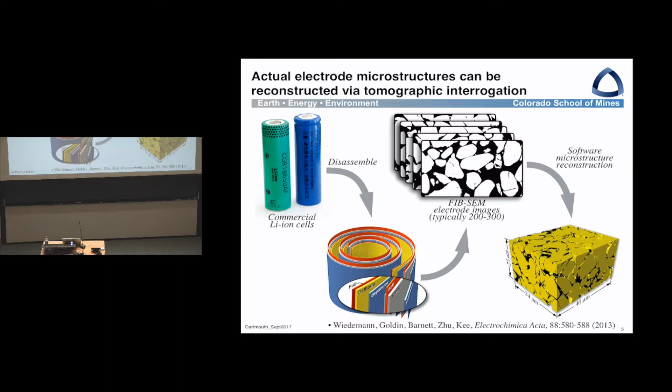Anyway, let me just, before I forget it, so this person, Graham Goldin, is your neighbor. He's sitting here in the middle, works at CD-adapco and does a lot of work on battery modeling.

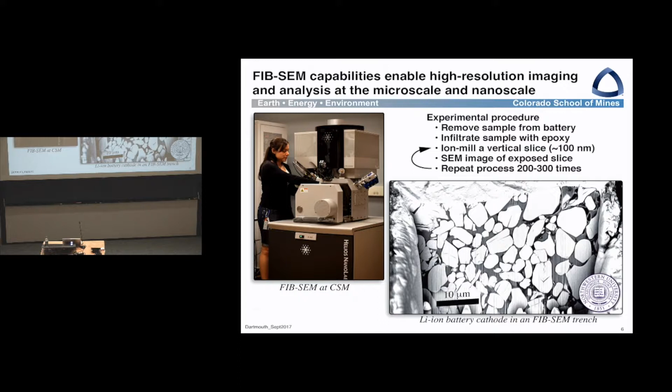Okay, here's just a quick image on how the FIB-SEM works. This is a focused ion beam SEM. You use a gallium beam to mill a face, take an SEM picture, mill it back another 100 nanometers or so, take another picture, do it a few hundred times, then just deliver these hundreds of images that I showed on the last slide to software, which reconstructs the three-dimensional microstructure.

We then mesh. I mean, these are very large simulations on a very small piece of real estate from the battery. But we can mesh this and look at the electrochemistry, look at the transport, and so on at that micro scale. So I'm not going to say much more about that. I mean, that's a talk in its own right that I want to move past here.

But once we've meshed it, then we actually go to commercial software. In this case, go to ANSYS, which again is your neighbor in Lebanon, as I'm sure everybody knows, and solve this electrochemistry problem on this microcube. I say almost a little bit tongue-in-cheek, if you look at these equations and you go, yep, that's right, okay, we're done. If you look at it and say, where in the world did that come from? You're not going to learn it in this lecture. It takes too long. So we're going to solve an electrochemistry problem on these microcubes.

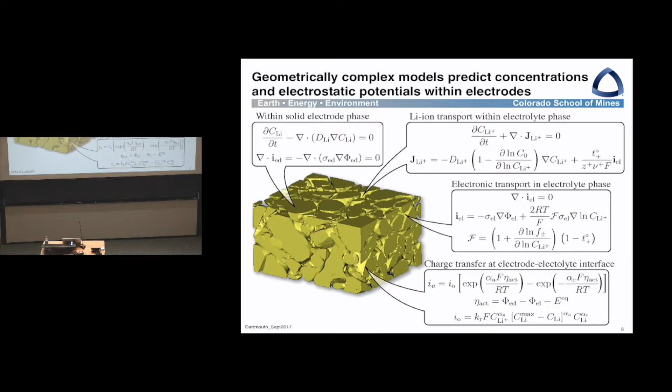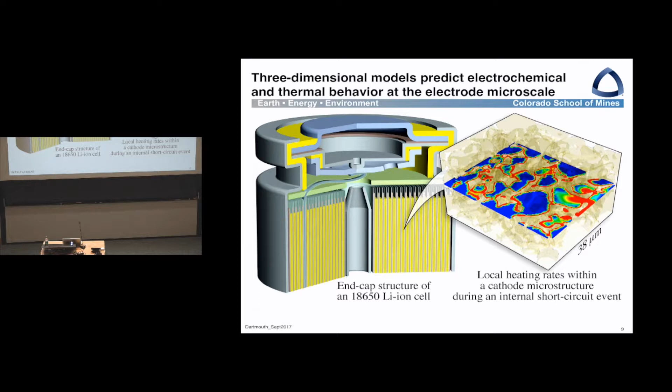This is one such result where we're looking at local temperatures as we discharge a battery. And you'll see relatively high temperatures just around the periphery. We've put a little bit of a short in here, so as the ion current is necked down toward that short, you see some local hot spots and so on.

One of the important things that we derive from these models is things like the effective conductivity, right? So we've got a very complex microstructure here, but if we're asking the relatively simple question of what is the average or the effective conductivity through that composite structure, it turns out even though the geometry is very complex, the computation is actually quite simple. And you can solve that on a big computer, but in a few minutes. I mean, that's a fairly rapid calculation.

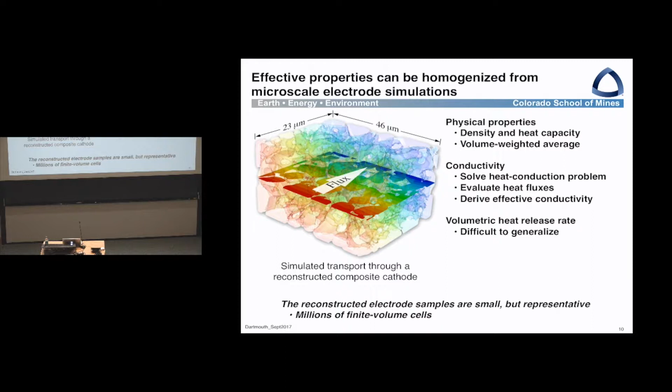And from looking at the actual fluxes through this microstructure, we can derive what the effective conductivities are. And that's actually quite useful to map that actual microstructural architecture back into models of the whole battery. What's difficult to do, and frankly we haven't really figured it out, is how to map the internal heat generation back to the big model.

Okay, so with that kind of background at the microstructure, let me take a huge step in length scale and talk about modeling whole cells. These are prismatic cells where we're showing temperature distribution under some discharge conditions. I'll point out that this simulation was done using ANSYS software, again, your neighbors here.

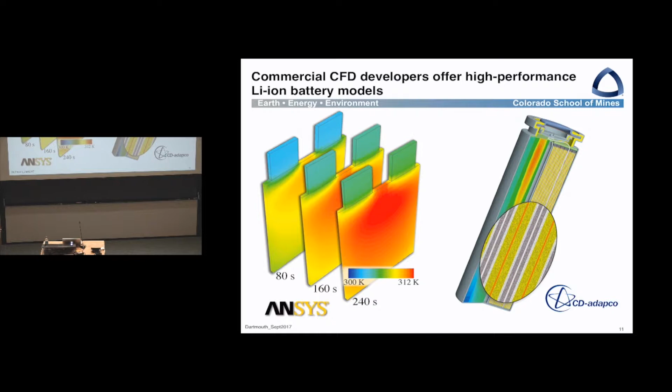This simulation, where we're looking here at hot spots around the tab, was done with CD-adapco, also your neighbors here. So you guys are really well positioned in this space to have very knowledgeable neighbors in the battery space.

Here's one simple example. We worry a lot about overheating then leading to accidents. I haven't seen one in the news recently, but Boeing Dreamliners had accidents that sidelined those airplanes for many, many months. Galaxy something or other telephones were catching on fire. These are real issues. It's not like your laptop catches on fire regularly. In fact, probably nobody in this room has ever had a laptop catch on fire or a telephone. But it is a real issue to make sure that these things are safe.

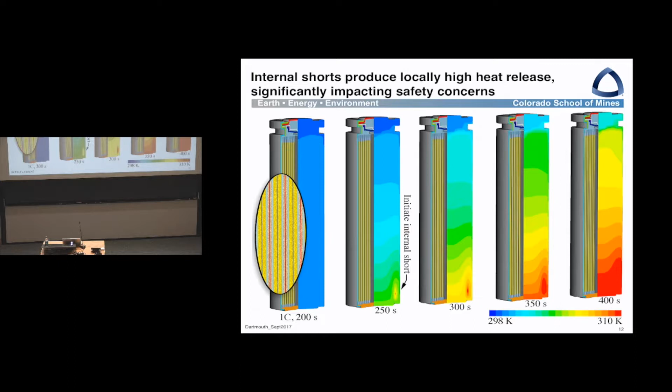So we're quite keen to know what happens if, for example, we have a dendritic short someplace in this battery, how that thermal response propagates and leads to accidents. What I'm showing here again at the macro scale or micro-macro scale in a jelly-rolled structure is if I look at the effective conductivity radially, then these foils have almost no effect because the thermal resistance of those metals is very low. There's basically no resistance. So the radial heat conduction is driven essentially entirely by the conduction of the electrodes.

But in the axial direction, it's quite different because now these metal foils, the current collectors, can channel heat axially much, much more efficiently than radially. So when we look, here again, I've taken a battery and just arbitrarily produced a short. In other words, a local hotspot in that battery.

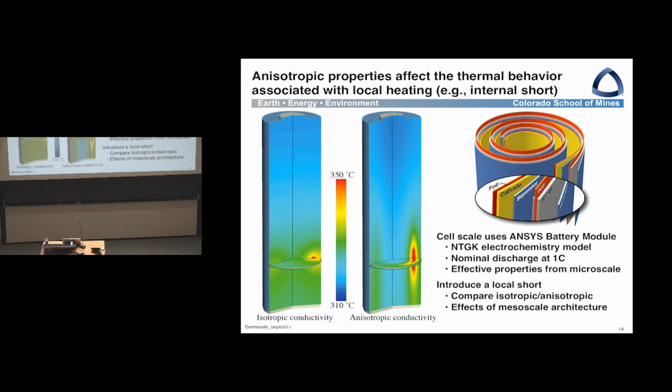And so what you see here is that compared to assuming isotropic properties, in fact, they're anisotropic properties, and because of the role of the current collector foils, you preferentially transport the heat axially and less so radially. And that has a big effect on the time it takes to come to a thermal runaway or some other accident event upon an internal short.

I take two slides here as a little bit of a detour, but actually at least an interesting detour. So this is in the chemical-mechanical coupling. So here is a lithium cobalt oxide particle that we've extracted from this three-dimensional structure I showed. We just extract an individual particle and intercalate it. And what I'm showing here, actually rather old data from Reimers and Dahn, shows that as you intercalate lithium into this cobalt oxide, at first there's a monoclinic phase, then there are actually two hexagonal phases as you intercalate or as you reverse back in the case of charging.

What's interesting about this is if you look at the lattice spacing, there's actually a considerable change in the lattice spacing as you intercalate, and it goes in a direction opposite from what you might think. You would intuitively think as you push lithium into this matrix, it would blow up like a balloon. In fact, that's not what happens. The lithium, since it's a positively charged ion, tends to attract the oxygen, the anions, and so it actually shrinks a little bit, and there's a fairly substantial difference in the lattice volume between these two hexagonal phases here.

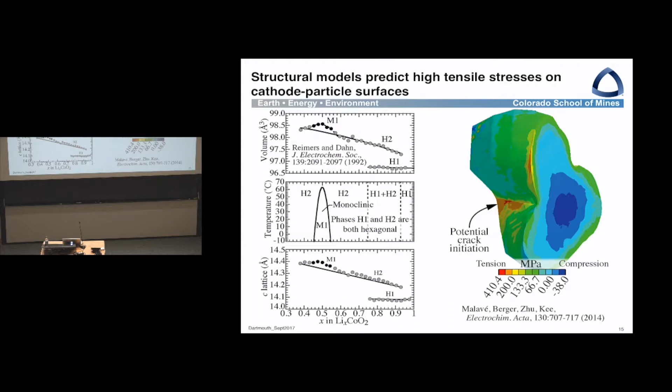With that kind of background on modeling the batteries alone, let me shift now to how we take some of that knowledge from modeling the batteries in sort of large-scale modeling. How do we incorporate that knowledge into things like control?

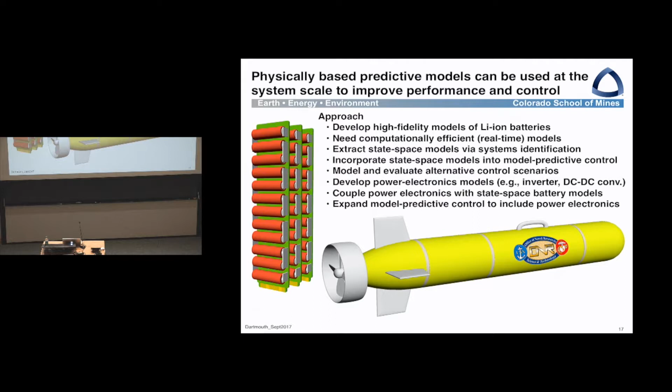They're often assembled onto blades that look like this, where you have diagnostics, electrical diagnostics and thermal diagnostics on the blades. And one of the things we want to do is to be able to incorporate some knowledge of how these batteries work into the power electronics and into the control scenarios. And I'll talk about that in the next few slides.

Okay, so a central connecting block between, let me just call it large-scale physical models. I mean, these can easily be million-state models, finite volume representations of thermal, electrochemistry, and so on. And we want to do a number of things like interpret the complex impedance, implement model predictive control, look at state of health monitoring, and so on.

And this sort of, in some sense, rather innocuous looking mathematical statement of a state space model is the bridge. And I'll say a lot more about that in the next few slides. But this is a locally linear model. And so you should rightly ask, come on, how can a linear model possibly represent a battery which is quite obviously nonlinear? And I'll try to explain that as I go on, but it can, but with some twists.

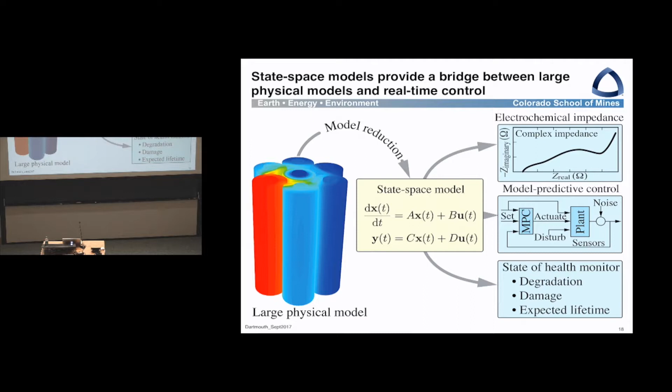So assuming that I need this state space model as the bridge between the physical models and things I want to do, I want to now talk about how do I get this state space model. So, okay, that's not what I want to say next.

I'm simply representing here what the battery management system looks like, which in our case will be a state space model and some power electronics, which facilitates perturbing the loads and so on in a way to understand the physics. And with actual sensors, actuation back to the system. Okay, that's just kind of a cartoon picture.

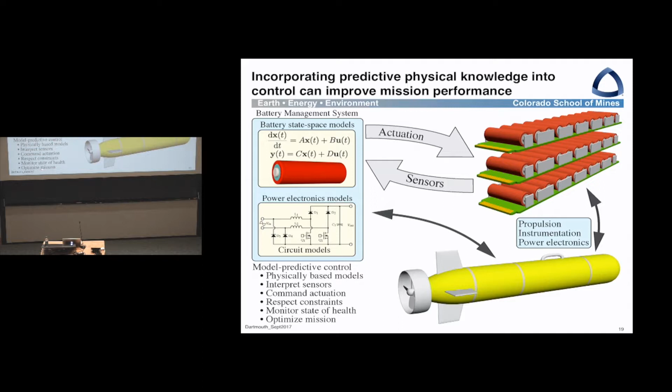Okay, let me come to the state space model. By the way, I'm just curious, how many people know what state space modeling is? Is that something we talk about here very much? Maybe a few do. Anyway, so if you already know, this next segment is sort of sophomoric, I suppose. If you don't know, hopefully you'll mostly get it.

Okay, so here's a state space model. X is called the state vector. It's an abstraction. You cannot associate an element in that state vector with something physical, like temperature, voltage, or something like that. It's an abstraction. In some sense, you could argue that's a downside of such models, but it is what it is.

U is the actuation vector. So if I'm controlling the current in charging or discharging a battery, then U is that current that's actuating the device. Y is the observable. So for example, I actuate current, but I observe voltage, temperature, maybe other things. But that's the Y vector, the observable. And D is basically disturbances and various things which sometimes come in.

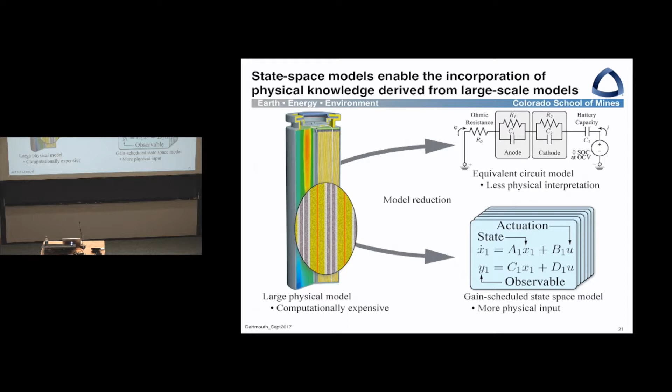So even though the state vector is an abstraction, the observable is not. And so these models predict observables, and we'll use that to interpret sensors in the control.

Here again, if you're familiar with impedance spectroscopy, which is just practiced everywhere in electrochemical devices, whether it's fuel cells or corrosion or batteries or what have you. What we're showing is the impedance in the complex space. These are frequently used, in fact, almost invariably used in every electrochemistry lab to represent electrochemical behavior as the complex impedance

associated with the device. What I'm just showing here are particular impedances that are for a particular battery at different states of charge, whether it's charging or discharging.

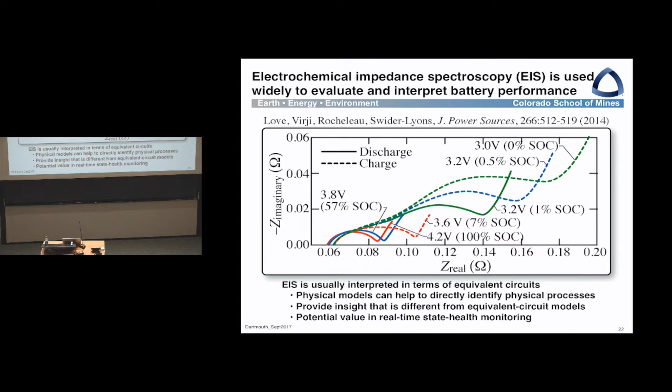In other words, the impedance tells you a lot about the state of charge of the battery. So again, at the risk of saying things that are obvious, if they're already obvious to you, what is the impedance? Well, as you say, harmonically perturb, say, the current onto an electrochemical device, and the response, say the voltage, is shifted both in amplitude and in phase.

Okay, now, in some ways this almost seems like cheating, but because that's so important, I mean, basically every electrochemistry lab in the world has an impedance spectrometer. That's just everywhere. And it's basically linear algebra manipulation. So all this stuff is automated in MATLAB, meaning if I've identified the state space model, which I haven't yet said how I'm going to do, that's coming in just a minute.

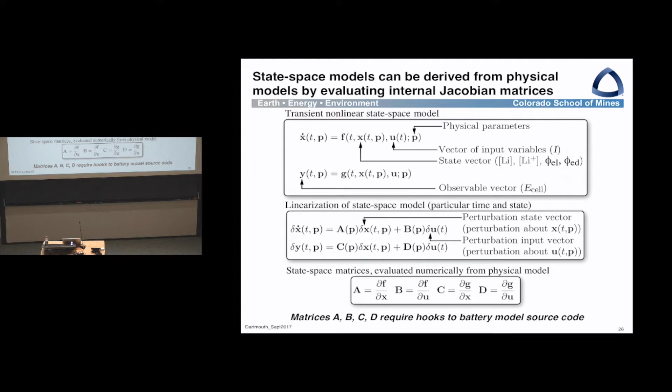Okay, this is what I said in words just a minute ago, again, in a pretty abstract way. If you assume this is a big model of a battery that may be 1 million states that I can differentiate, I can extract these matrices. Let me just leave it at that because it's not really what we do, unless we're just working on our own models.

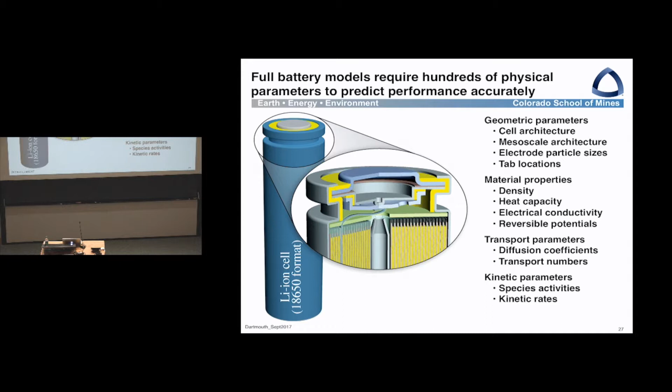Okay, so let me come back now to a full battery model. And let me say there are many, many parameters in a battery model. What are the thicknesses of these electrodes? How thick are the collection foils? Where are the tabs? What are the material properties? What's the microstructure of the electrodes? What are the diffusion coefficients of lithium ions in, say, ethylene carbonate electrolyte solvent? There's literally hundreds of parameters to define a particular cell.

And so one of the tools that we use is coming from CD-adapco, or actually more directly from a company called Battery, I can't remember, Battery Design Studio is the software. Is that also the company? Anyway, it doesn't matter. So part of CD-adapco is they've got a couple of batteries that are very, very well defined in terms of the space. And this is just showing a user interface where it gives you the opportunity to literally put in hundreds of variables to define a battery.

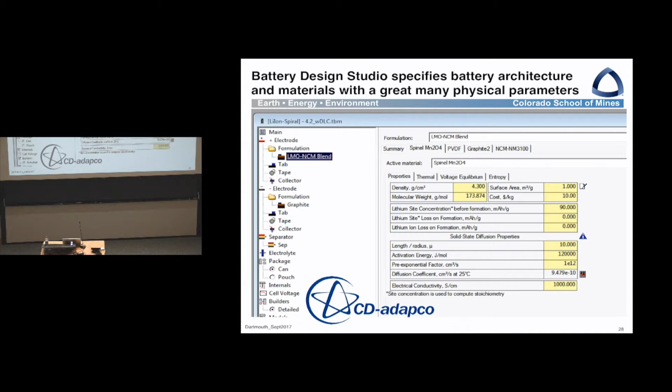And in a few batteries, we use a Sanyo 1500 milliamp hour battery that's been very well characterized for a lot of what we do.

Okay, so interior to the software like Battery Design Studio are a number, like 20, so-called Newman models. So John Newman, professor at Berkeley, published this general approach to modeling batteries, one-dimensional models, in I think the first paper was 1993 or so. Okay, so a long time. But those are the dominant models in the lithium-ion battery space.

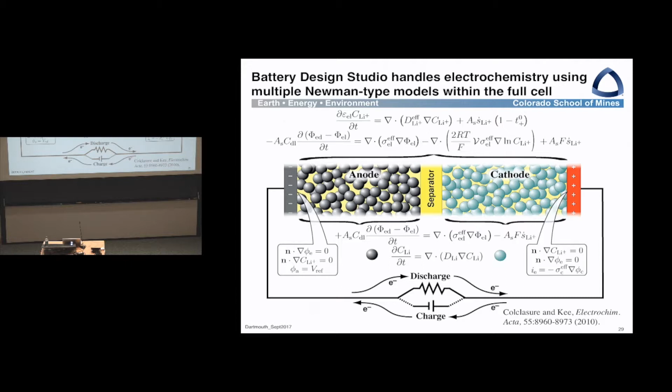And what this Battery Design Studio does is lay out the full architecture of the battery and then implement roughly 20 of these models interior to that battery, which then gives the overall performance. This is our own representation. I mean, many people have built essentially replicas of the Newman type models. And as I said earlier, I'm not going to dig into the mathematics of that.

Okay. Now, how do the PRBSs work? Well, we take, again, roughly speaking, a million state model, and we perturb it with small current steps in the milliamp range. Okay, so small current steps that are of different duration, but usually the same magnitude. So then we drive the physical model with these perturbations and observe the response.

In this case, I'm simply showing the observed response in the voltage, but we also look at temperature and other things. And because this is so widely practiced in the control literature, MATLAB has automated those tools. Again, I can go into the mathematics of that, but as a practical matter, I take this input stream, drive a physical process with this input stream, observe the response. I now have two long vectors, input, output. And there may be multiple outputs, there may be multiple inputs.

And again, at this minute, I'll just make it almost like magic. You present those two wave trains to MATLAB, and it delivers you these matrices. I mean, it's so widely practiced that it's been automated. And so any individual doesn't really have to go write that software. It's just already been written. It's probably worthwhile to understand it, but you don't have to write it. It's done.

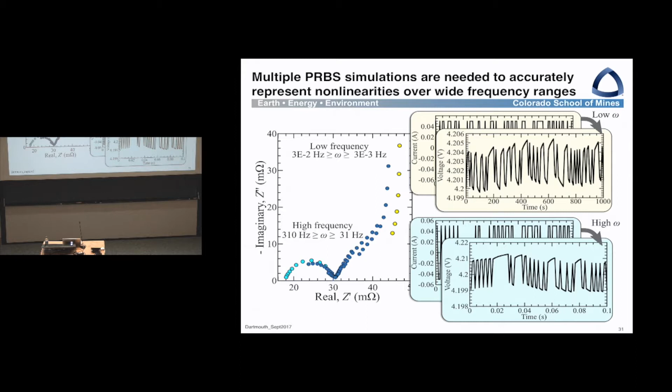Then we use what are called stitching algorithms. I put some of the mathematics up here, but you use so-called stitching algorithms to take the PRBS identification at different frequencies. We typically run 3 or 4 different frequency ranges and then so-called stitch the state space model back together.

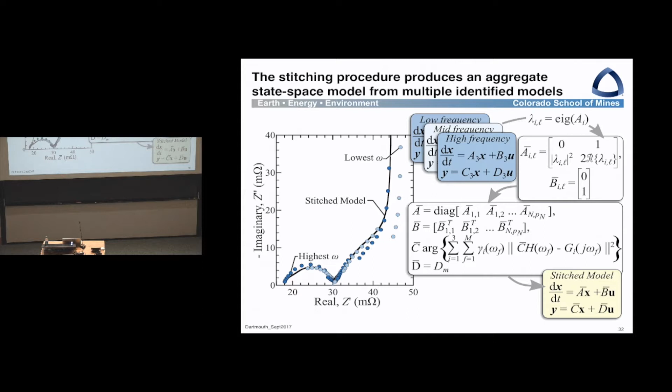Now, if you were taking the physical model and numerically or even analytically differentiating it, you wouldn't have to do this. You would just get the matrices straight out. But as a practical matter, it's more accurate to identify in frequency ranges and then stitch the state space model back together.

Whoops, that's interesting. I don't know why, but there's nothing on my screen and there's nothing there. Okay, try. Okay, I don't know why. Oh, it's there. Okay. All right, I think I might have skipped a slide there, but it's probably fine.

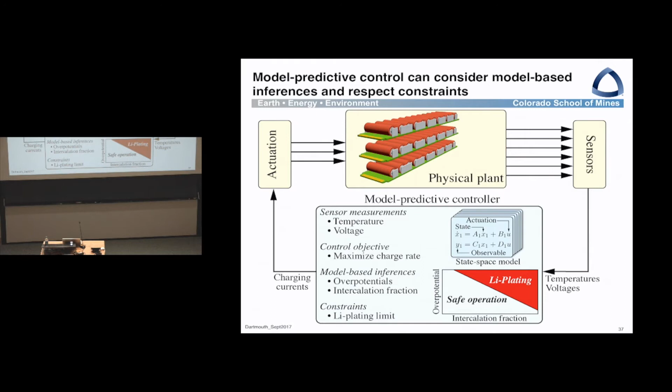So for example, I want to stay out of this region where we would have lithium plating. So as the temperature goes down, it limits the voltage I can charge at, and things like that. So the model predictive control enables the respect of constraints. Things like PID control, for example, cannot. Right? There's just no way to impose constraints with, say, a PID controller. But with a model predictive controller, you can.

Okay, so I'm going to spend a couple of slides trying to explain that in a little bit more detail. So here's a physical plant. We read the sensors. So here I'm just assuming, let's say, measure temperature and voltage. And those are real sensors that I'm going to call Y observed. So Y is the observable, and I'm actually reading some real sensors.

Then I'm going to do a so-called moving horizon estimation where we first bring in the actual readings, voltage, for example. Then I need to determine the operating point. In other words, what is the state of this battery? What's its state of charge? What's its temperature? And so on. I need that information in order to go back to the gain scheduled model to know how to blend between these various linear models. I'm then going to solve the state space model to predict states and observables.

I'm then going to change the state. This is sort of like revisionist history, but this is how this works. I'm going to change the states in an orderly way so as to minimize the difference between what the model said the sensors should read and what the sensors actually read. And so that, I think, is sort of intuitively understandable. We're also going to adjust the states to minimize the modeling error, which is less intuitively understandable.

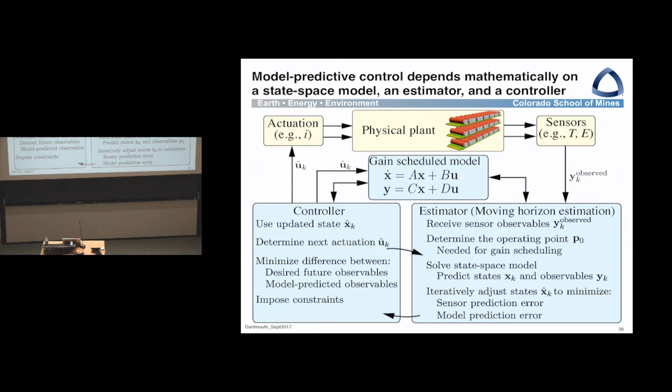Then that information gets passed over to the controller, which ultimately decides what the actuation should be for the next step of the controller clock. Okay? So that's said kind of in words. I won't spend much time on this, but the words I just said can be manifested mathematically. I mean, these are operations that we can do, and despite the fact that the mathematics may or may not look complicated, it's actually fast and easily programmed.

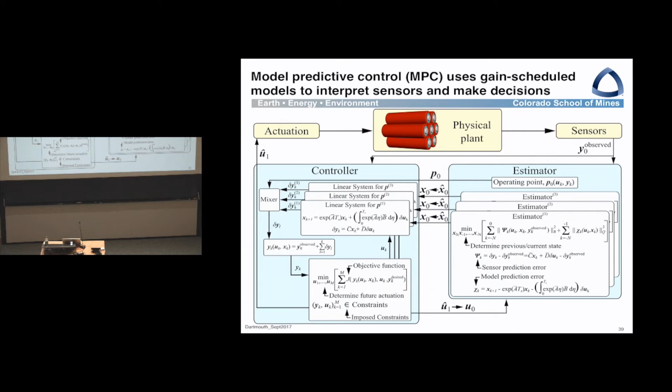So this is a representation of the last slide I just showed, but now in graphical terms. So the estimator, Kalman filter if you like, moving horizon estimator, is an iterative loop. And so what happens is we look at the error between the actual sensors and what the model says the sensors should read. And they're naturally never the same. This is a relatively simple model, and we're not controlling on the model. We're controlling on the sensors, but we're using the model to interpret the sensors in an intelligent way.

In addition, which is, it takes a while to get your arms around this one, but here's some estimate of the current states. We can then solve, even retroactively, if I have this state and I've got the model, I can predict what the steady state solution, the state-space solution is for each of these prior states. And the estimator minimizes the sensor error and this model prediction error by changing the historical states.

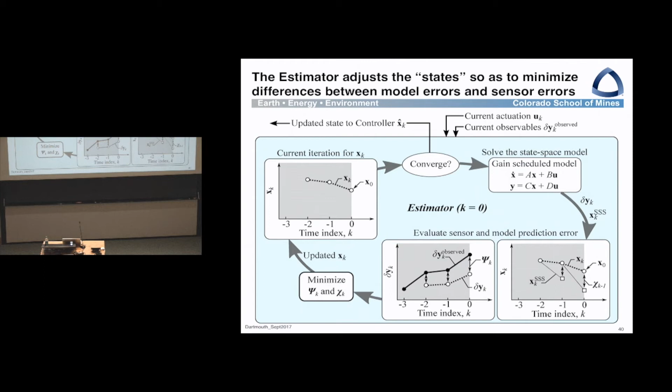That probably seems odd to you because the historical states are whatever they are. But in order to look forward, it turns out that these moving horizon estimators actually go back and revise the earlier states in a way to make a better prediction of the future. So that iterates until it satisfies some convergence criteria.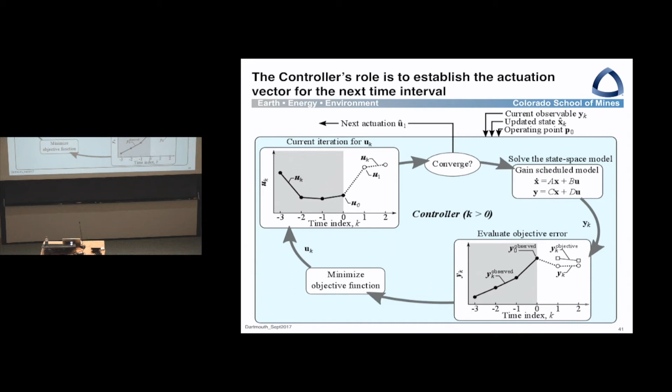Then there's an optimization within the control that minimizes the difference between what the model says the observable will be into the future compared to the objective of what you want the result to be. So in other words, you want to look ahead and have the controller change the actuation to some objective function, battery life for example, or any number of things.

Okay, so let's look at a couple of quick examples. We're going to look at two charging scenarios. One I'm going to try and completely charge in 800 seconds, another one in 1500 seconds. And the objective is to maximize the end state of charge. In other words, I want to fully charge the battery in some amount of time, but I want to respect some constraints. I don't want to charge so fast that I overcharge and cause dendrite growth or some other damage to the battery. That's one of the failure modes of batteries, is overcharging.

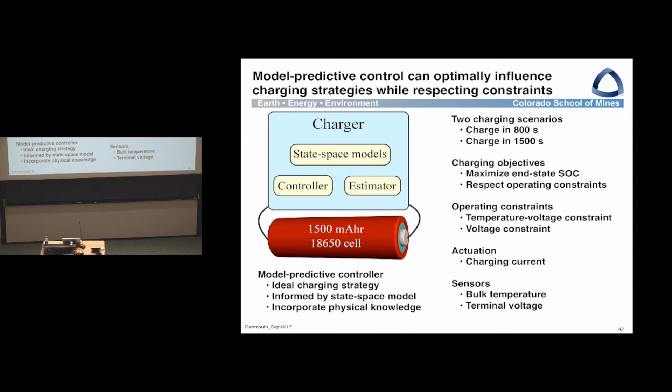So I'm going to impose two constraints. One is a temperature voltage constraint, one is a voltage constraint. We're going to actuate the current, and we're going to assume that we've got sensors that measure bulk temperature of the battery and the terminal voltage.

So here's a discharged battery that's sitting here at 3.6 volts and 25 degrees. So this is now running a controller. It's not explicitly controlled by me. This is now under control of this model predictive control. And what we see is charging. As the battery charges, of course, the voltage goes up and the temperature goes up.

But at this point, we run into a constraint that says if the temperature is what, the voltage, you can't exceed a certain voltage. Right, so smart chargers need to respect these constraints because you can overcharge, you can make dendrites, you can have all kinds of problems.

So then what happens is to stay on this constraint, but we still want to keep charging, the controller rides down this constraint until it hits another constraint that says, I don't want to charge above 4.15 volts, because that would also be a damage mechanism. So what happens in these two scenarios is that the controller up to this point basically follows the same trajectory.

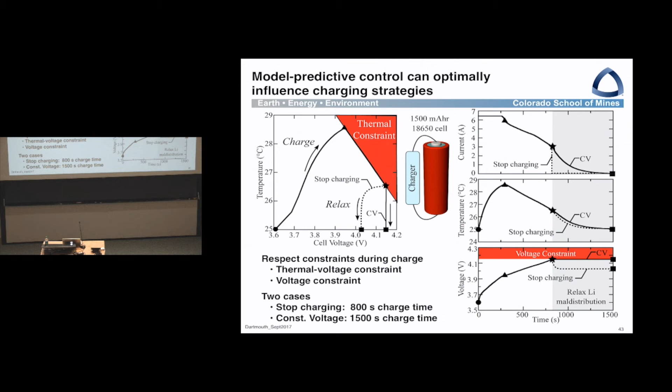So then you stop charging, but as the lithium then diffuses into the interior of the electrodes, the voltage now relaxes. So you weren't really fully charged. In the second charging strategy, we come to this constraint, but we continue charging at constant voltage, and then that fully charges the battery, brings it to 100% state of charge. Anyway, that's just one example.

I'm going to jump quickly here to another example that now we're charging a bank of batteries that start with each of the batteries at a different state of charge. So you may or may not want to do that. I mean, there are reasons why you want to charge and discharge batteries in a bank differently. The important part I want to make here is that the constraints now are on overpotential and intercalation fraction. But there are no sensors to measure either.

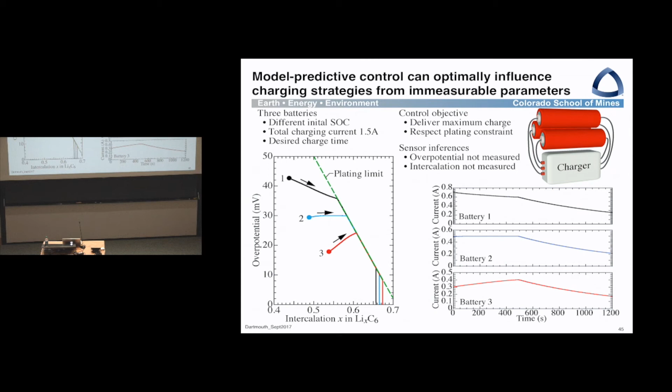You have no way to measure overpotential. You can measure electric potential or electrostatic potential, but you can't measure overpotential, and you have no direct measure of what the fraction of lithium in, say, a graphite is. So what we're doing here is controlling multiple batteries, but also controlling to sensor inferences, not sensors directly.

Okay, let me just say very, very briefly, one of the things we're keen to do, and this is work with Corey Love at the Naval Research Lab, is to look at single frequency impedance. So rather than do an impedance sweep over all frequencies, we'll look at, say, 300 hertz or something like that.

And what Corey has observed experimentally is that as a battery is damaged or otherwise aged, then you get impedance shifts. And what we're trying to do is to build that knowledge into the controller. So we see a shift in frequency to try and assign that to some physical behavior, such as an overcharge event, and then control to that.

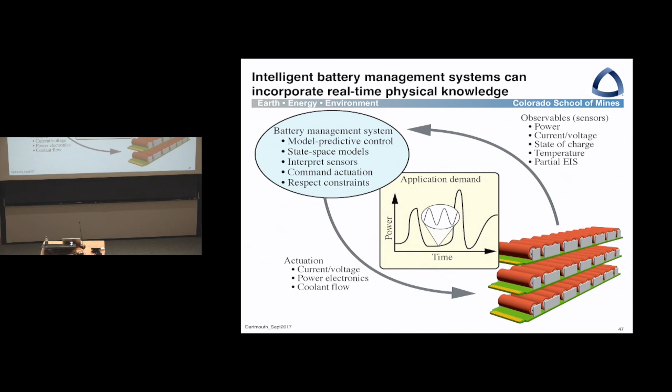So in this case, what we want to do is take, say, a power demand curve, but instead of simply delivering that power to the motor or whatever the end use is, we'll put essentially a carrier frequency at some frequency, and then interpret impedance shifts in terms of battery damage or something like that, and then take corrective action before there's actually a problem.

I'm going to jump over all this, I'm just with one eye on the clock. I think it's time to close. So let me just summarize by saying that to really understand battery technology, we really need to understand physical processes over actually very wide ranges of time and length scales. Okay, that's almost a hackneyed comment anymore, right? I mean, everybody's talking about disparate time scales and so on, but it's certainly the case in batteries.

So I showed some images of actual reconstructed electrodes. I talked a little bit about these so-called quasi-one-dimensional porous electrode models, the so-called Newman models, how that gets then embedded through, say, Battery Design Studio into full cell scale models, which are fine in their own right in the sense of design.

But in terms of control or sort of more real-time things, we need to reduce those models, and we reduce them through state-space modeling, which is, again, the bridge, if you like, between large physical models and small real-time models. We then use those state-space models to enable the interpretation of measurable electrochemical impedance, to implement model predictive control, optimal mission accomplishment, for example, state of health monitoring that I just talked about very, very briefly.